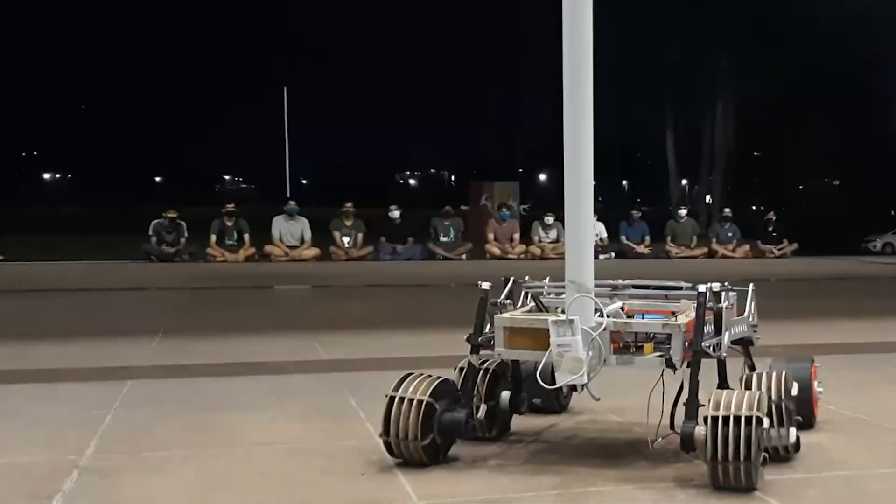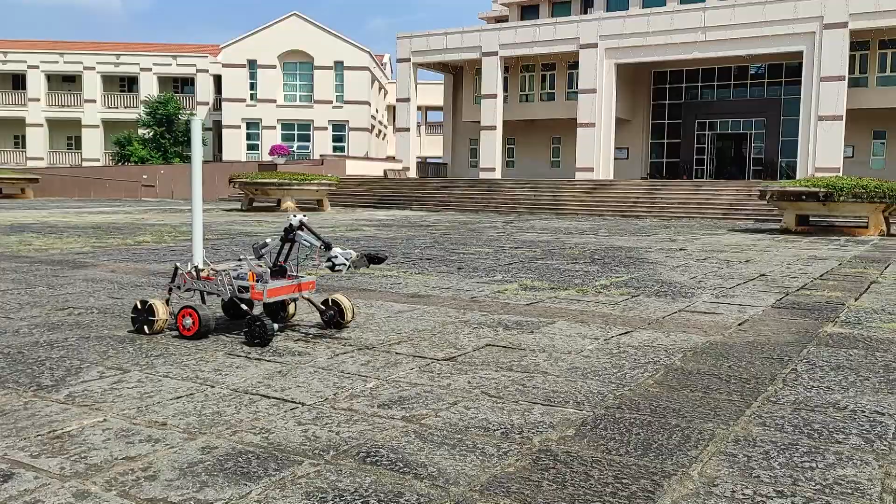The team is divided into 6 subsystems: mechanical, controls, power, communications, autonomous, and life detection.

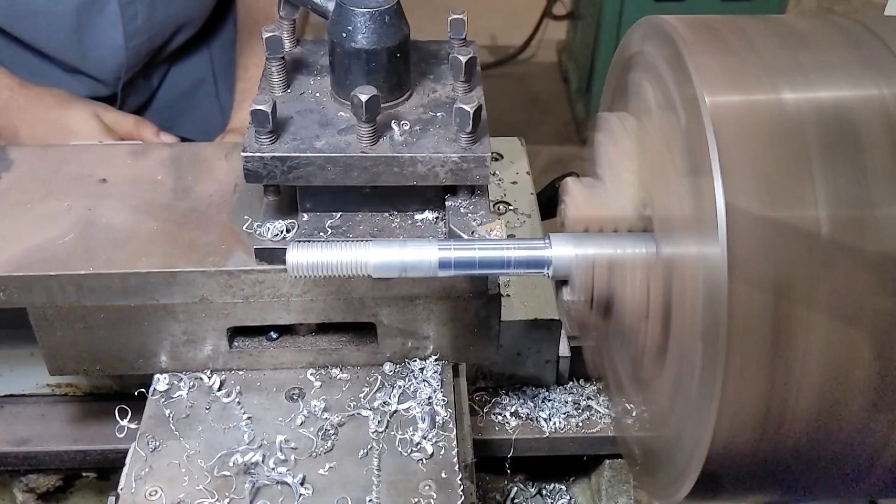The mechanical subsystem works on design, analysis, manufacturing, and complete assembly of the chassis, arm, drive, and the life detection systems of the rover. The redesigned chassis will be made by welding aluminum sections and will be more compact than the previous iteration. A separate arm mount is added in front for easy assembly, and a separate electronics box is made for storage and easy accessibility to all the onboard electronics components.

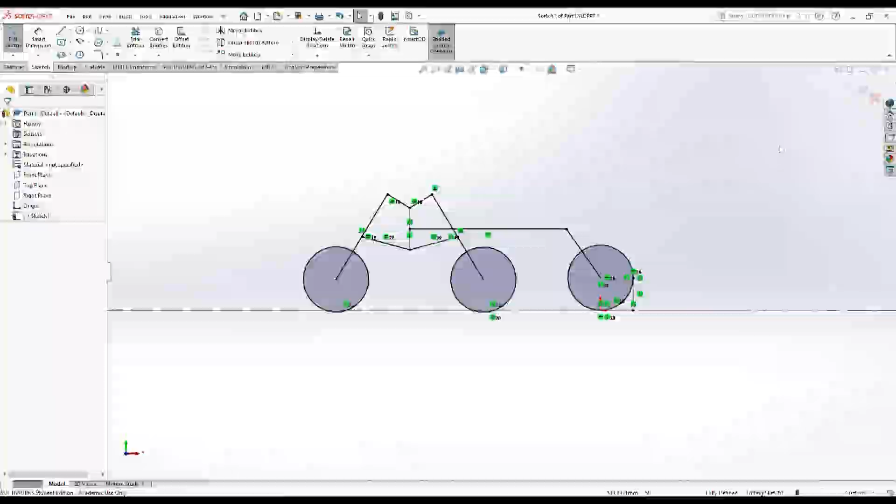For the drive system of the rover, we have designed a more robust double lambda rocker bogie system with a differential averaging mechanism, helping the rover travel through challenging terrain. This year, we have also moved the averaging mechanism towards the back of the rover to provide more stability, also helping easy access to the electronics box.

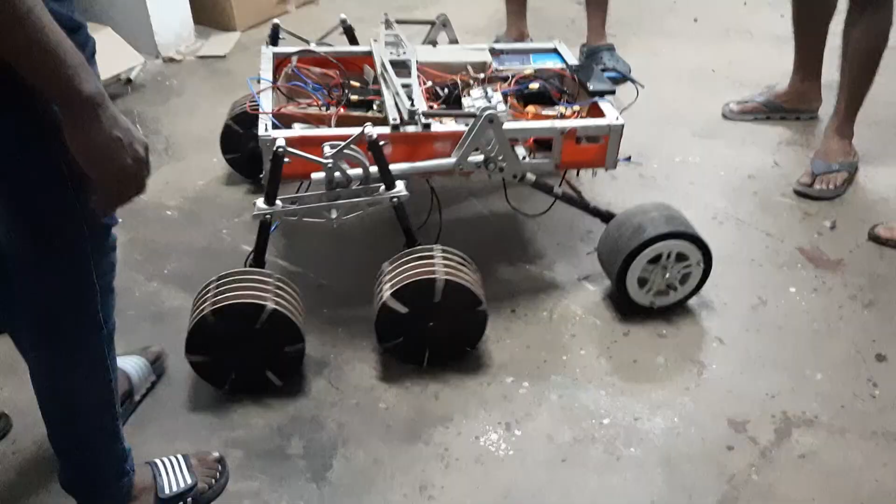We are using a 6-wheel differential drive mechanism for the rover. The 3D printed wheels are designed to keep the weight minimum, while refining shock absorbance of the wheel. For better traction, grousers are directly printed with the wheel. We have optimized the wheel design for faster assembly and for providing protection to the drive motors.

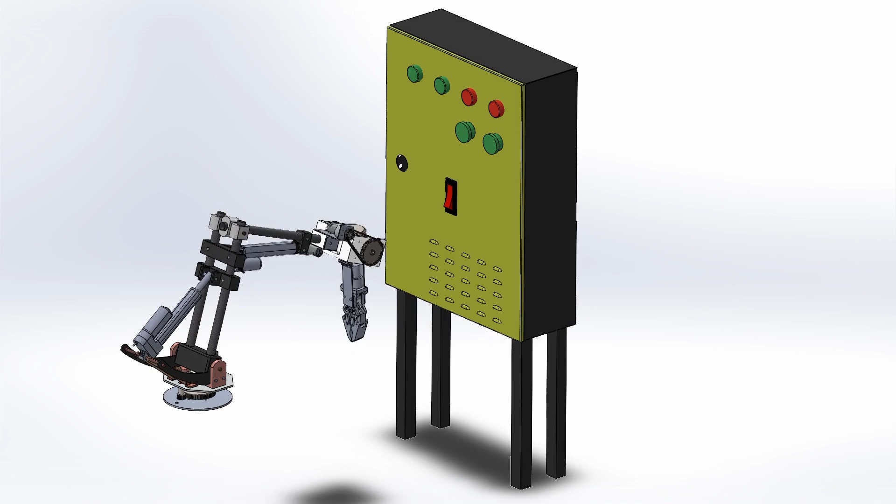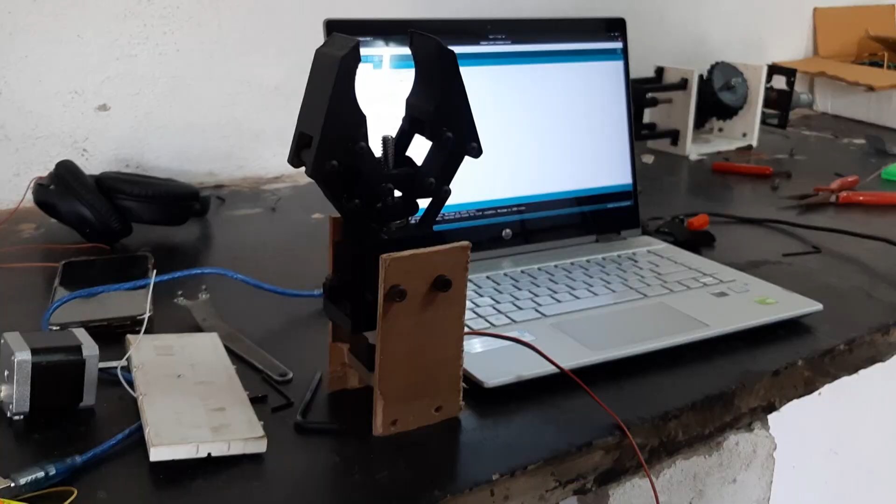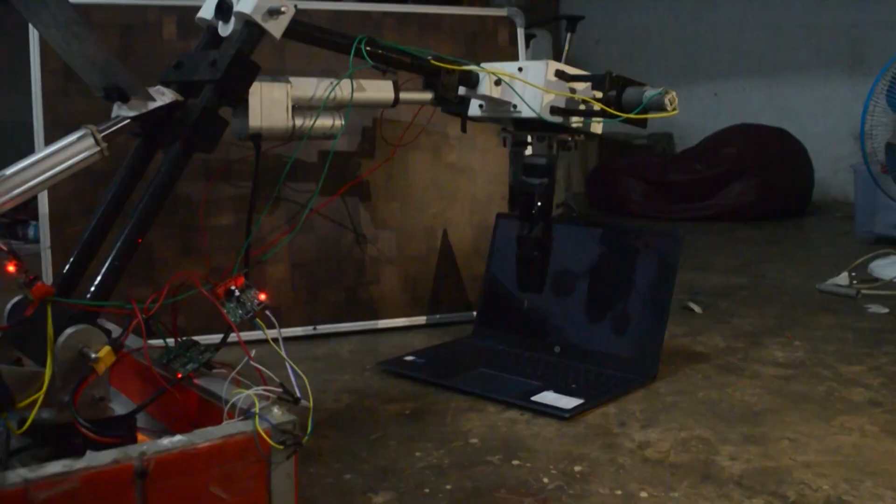The 5 degree of freedom robotic arm is made of carbon fiber tubes, reducing weight from the previous iteration while conserving strength. For base rotation of the arm, a new spur gear mechanism is designed to increase stability and robustness. The gripper jaws are controlled by a 4-bar linkage mechanism, and for its roll and pitch motion, a differential bevel gear mechanism is used. Our 5 degree of freedom arm is controlled by 2 linear actuators and uses inverse kinematics in ROS with a closed loop feedback system optimized for high precision and accurate execution.

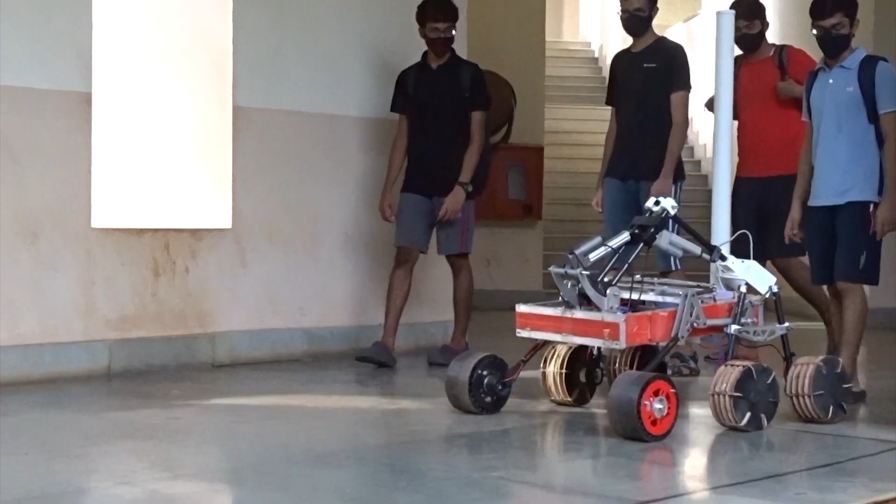We use a Jetson Xavier as the primary onboard computer and have shifted from Atmega 328P to STM32F1 as the primary microcontroller. The rover can be manually teleoperated from joystick commands sent to the microcontroller over ROS serial. After computing differential drive wheel velocities, we use serial communication between the microcontroller and motor drivers.

The autonomous subsystem is dedicated towards autonomous traversal of the rover and is focused on detection of arrows and an orange traffic cone. After testing several image processing and neural network based methods for real-time detection of arrows, the YOLO algorithm for object detection and classification was chosen.

We annotated and augmented a custom dataset of 1100 plus arrow images to train YOLO v3. Darknet ROS is being used to deploy the model on ROS. 4-point perspective transform, contour extraction and filtering were done using the OpenCV library to determine the arrow direction from the cropped arrow which is localized by YOLO.

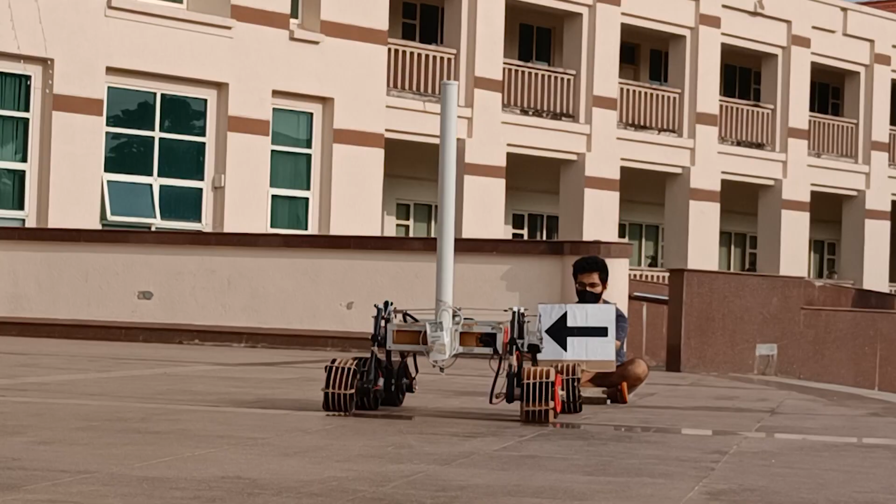The orange traffic cone is detected using pixel-wise color thresholding. A custom visual servoing algorithm ensures that the rover follows the arrow. The entire task was simulated on a minibot and finally on the rover.

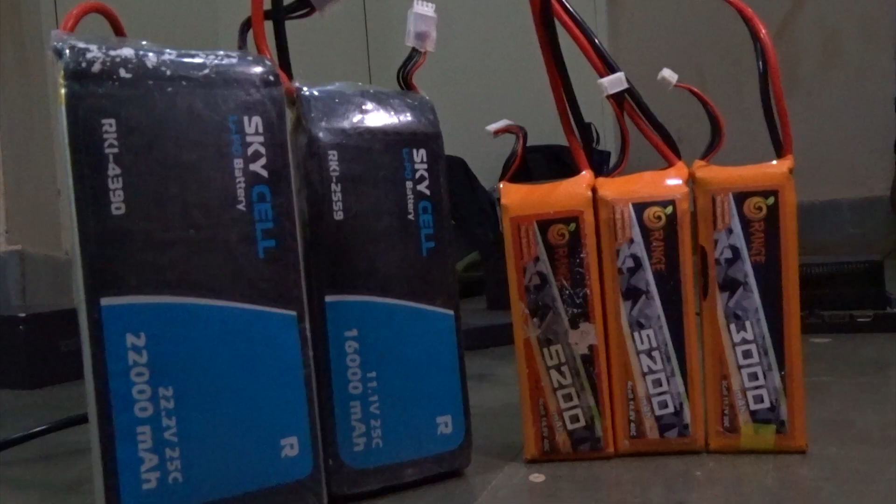The power subsystem is responsible for powering the entire rover, and we use LiPo batteries for the same. PCBs have been designed and manufactured to power onboard components. The current fed to the equipment is capped at a safe threshold using sensors. A BMS is designed to monitor the state of charge and enable balancing of the individual cells using techniques such as Coulomb counting and Kalman filters. We use an emergency kill switch to shut down the rover immediately.

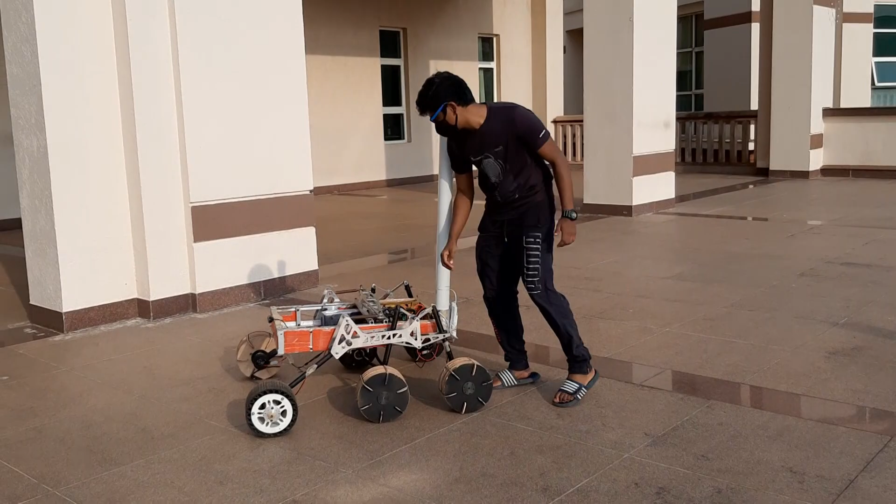For communication between the rover and the base station, we are using 2 Rocket M2 radios with an omnidirectional antenna on the rover and a sector antenna on the base station that gives a coverage area of 120 degrees. We are employing a video compression algorithm using OpenCV that enables us to launch multiple camera feeds from the onboard camera simultaneously with minimal latency.

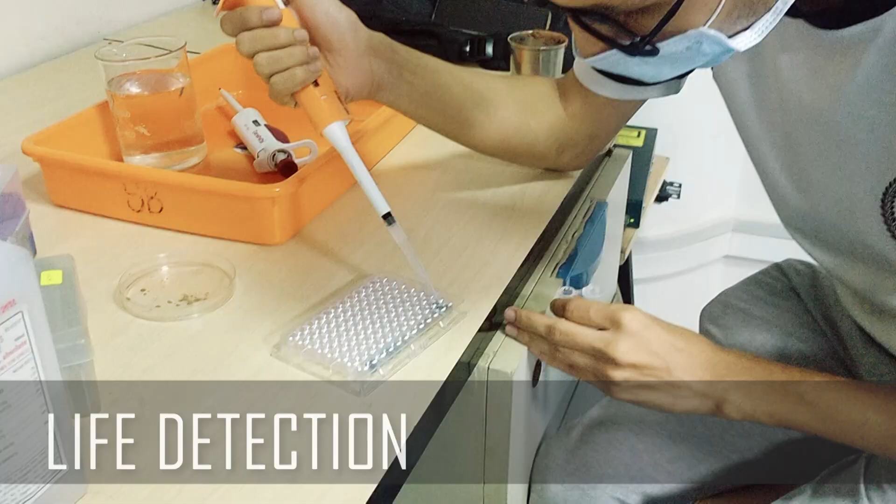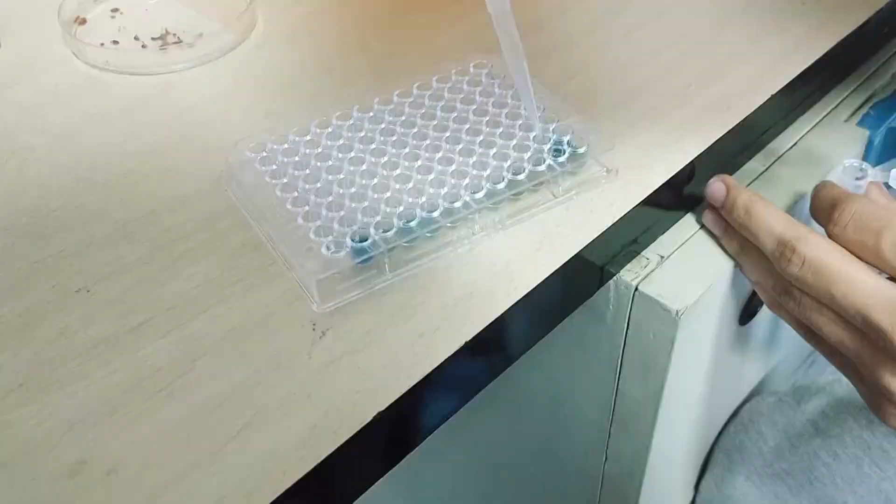Life detection aboard Kratos is divided into 3 parts: the soil collection and biomolecular analysis system, image analysis of rocks and soil organic content, and environmental sensors. The soil collection is done using a ratchet wheel mechanism. It is then deposited into 3 different compartments, ensuring zero cross-contamination. Peristaltic pumps are used to deliver solutions to the samples, following a strict no-spill policy, to perform the biochemical tests.

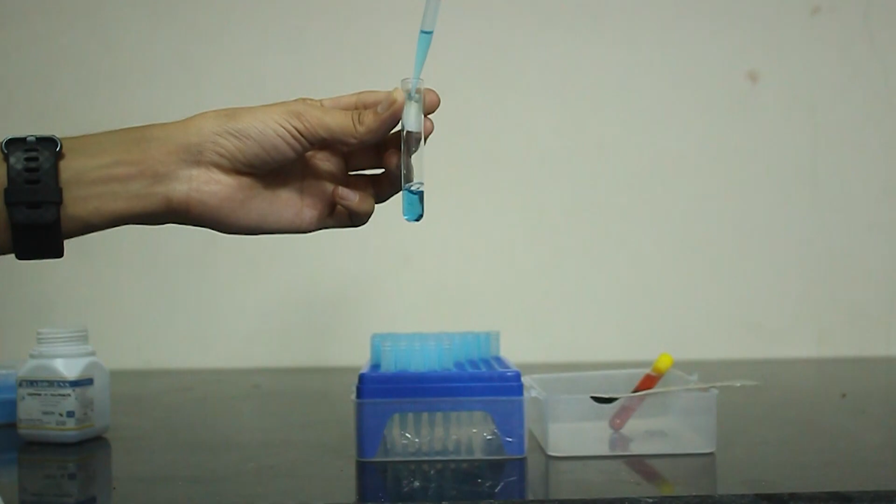The Bradford test for proteins and Sudan test for lipids are used to determine if life is extant or extinct in the soil sample. The soil organic content analysis is conducted using a pre-trained regression model that captures the image and estimates the organic content present with reference to a Munsell chart.

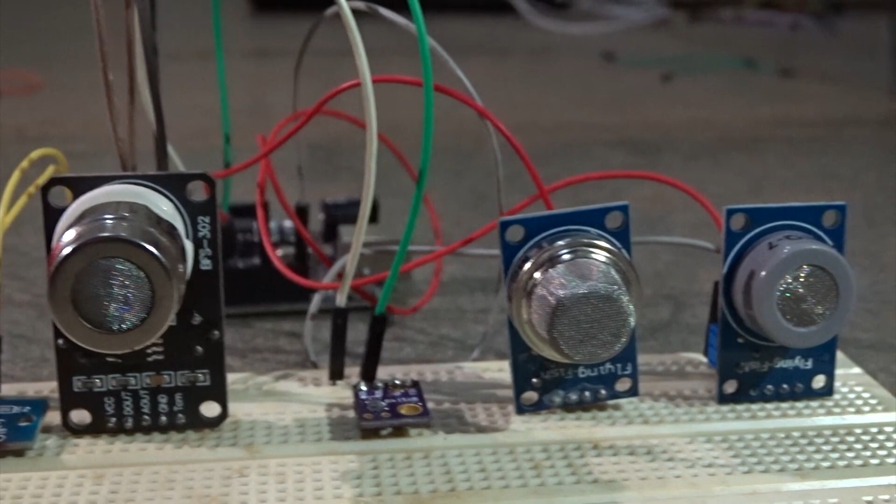The rock analysis is done using the IPU, or the image processing unit. A CNN model is used to classify the rocks along with a green and red LED spectrometer with specific wavelengths that can image any living colonies present on the rock surface. A suite of onboard sensors for soil moisture and temperature, atmospheric humidity, temperature, pressure, carbon dioxide, and other gases are key to performing habitability analysis along with the soil images.

For educational outreach, we annually conduct an open-to-all 8-week summer technical project. The project also acts as our mode of recruitment for new team members.